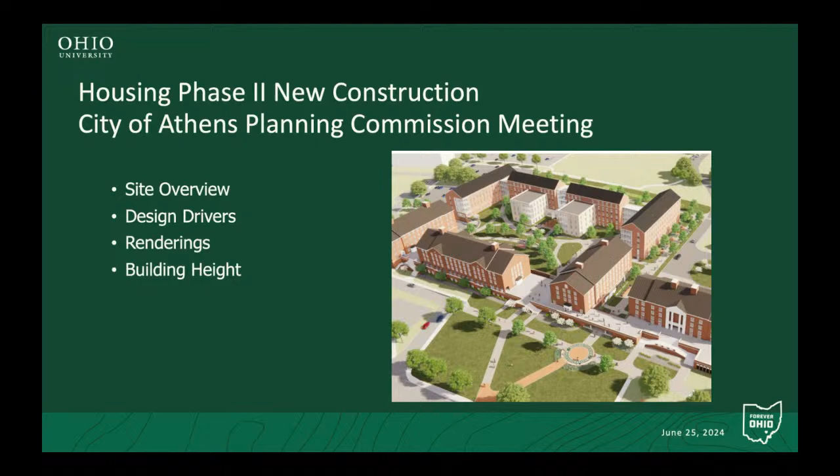I also want to talk a little bit about our nonconformance with the zoning ordinance in the R3 neighborhood in which we're building this property. So I'll spend just 5 or 10 minutes giving you an overview. Please feel free to interrupt, ask any questions. I'd be happy to answer any along the way.

This is a new residence hall being built on South Green, just behind the front four, which many of you are familiar with. It's a 591-bed residence hall, about 165,000 square feet and 5 stories. It will be built, as many of you know, in the FEMA designated 1% flood zone, so we've taken that into account in our design, building the site up out of the flood zone. The first occupied floor will be 642 feet above sea level, about 1.8 feet above the 1% flood elevation.

To give you an overview of the site, on the screen you'll see the front four buildings and Wilson Hall along the top, and just to the east, below those buildings, Pickering, Brown, and MacKinnon, you'll see the new proposed residence hall. This is one building — although on this plan it might look like 3 buildings, they are all connected. It has one address, one fire alarm system, and is being treated as one facility.

We have coordinated the design of this building with all of the emergency services within Athens, and as I mentioned, we've just started construction back in early May with some of the deep foundation and site work.

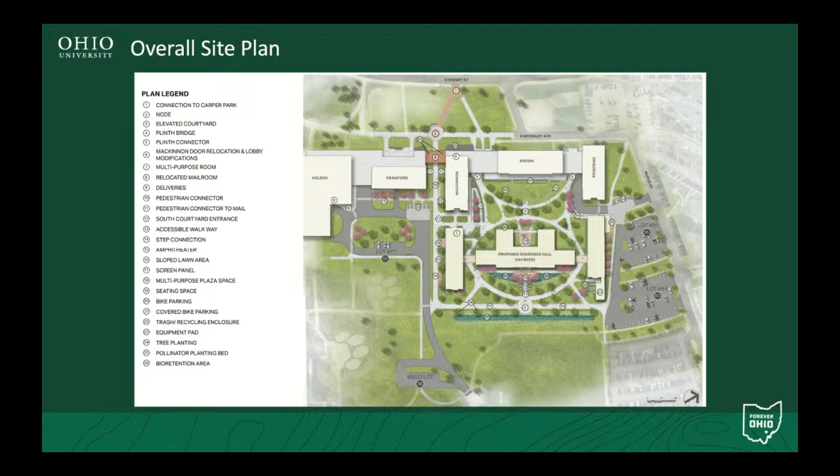To give you an overview of what drove us as we designed this project, the focus was on creating a modern, flexible, active environment that meets the needs of our students today. A big part of our design process was engaging the student body to hear what was important to them. One theme that rang true throughout was health, wellness, activity, and connection to the outdoors. You'll see how we've incorporated these elements into the design, including the siting of the building on South Green with adjacency to the bike path and the Hocking River.

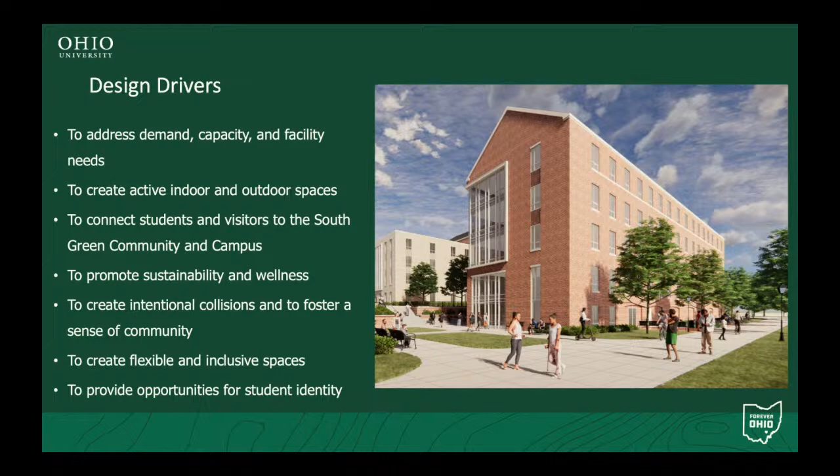I'll spend a couple minutes going through a few renderings. This is one of my favorite shots of the building, rendered from above, showing the size and scale of the building and how it relates to the existing facilities in the front four. Many of you remember the back south buildings that previously occupied this area. Starting in 2016, we began taking several of those buildings offline because of deferred maintenance and their inability to meet the program needs of today's students. That made space for the construction of this new facility.

This is a view from the east, with the Hocking River behind me in this view. As I mentioned, connection to the outdoors was an important part of the design process for our students. You can see how we've intentionally designed this back door of the residence hall to provide connectivity to the river, to the bike path, to the recreation fields on this part of campus, as well as to the green space we've worked hard to preserve through the design process.

Which is a good transition into our nonconformance with the zoning. This is an R3 zoned area in the city, and the maximum allowable height for a facility here is 2.5 stories or 35 feet. I outlined in the cover letter that our building as designed is 5 stories and about 69 feet tall, so it is above the allowable height limit.

That summarizes what I wanted to share with you today, but I'd be happy to answer any questions about this facility, our intent, the program of the facility, or our intent to invoke the government property exemption clause within the zoning ordinance.

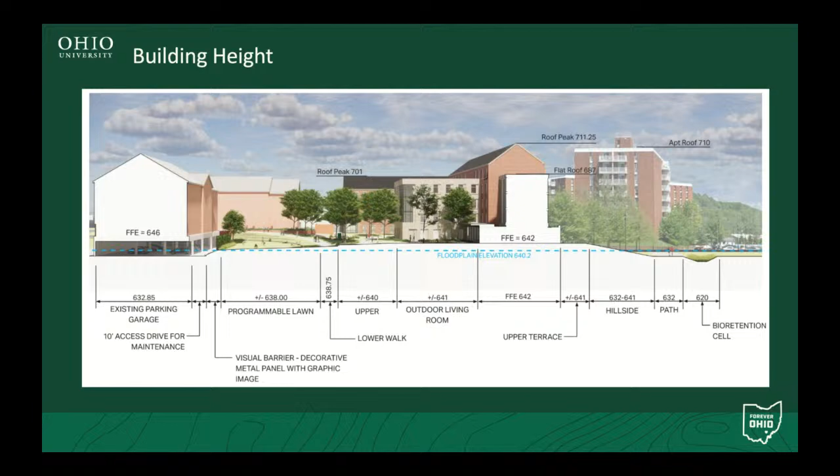So there are several single-user restrooms in that space, as well as kind of an open community meeting room type of space. That space has been designed for flow-through flood construction, so in the event of a flood at that elevation, it would be able to flow through that space, and it's been designed to meet all those building code and associated requirements.

Mr. Chair, we know that the current FIS flood insurance study is going to be modified this September. That elevation will change at this site. So we asked the engineer and architects looking at that to check both of those base flood elevations, the 1% he's talking about, and it meets the requirements for both the existing FIS and that new proposed FIS that will become effective this fall. So we looked at both of those, and it still meets all the requirements.

In addition, we talked to the architect and engineer about making sure that the fill they're putting in is compacted correctly as required by FEMA regulations. They also did checks to make sure that the bottom of the elevator shaft is not going to have a problem with buoyancy in the event of a flood. So they did a lot of extra work to make sure this meets all the requirements of FEMA.

Thank you for that. So you are not adding any parking? In fact, you may have taken some away with the site you're using? We are. We're actually removing about 180 surface parking spaces. We do intend to bring some of that surface parking back into this part of campus in the future, although it's not intended as part of this project. We're considering options for additional surface parking spaces as a separate project, and any associated water quality issues and best management practices will be taken into account in the design of that parking lot.

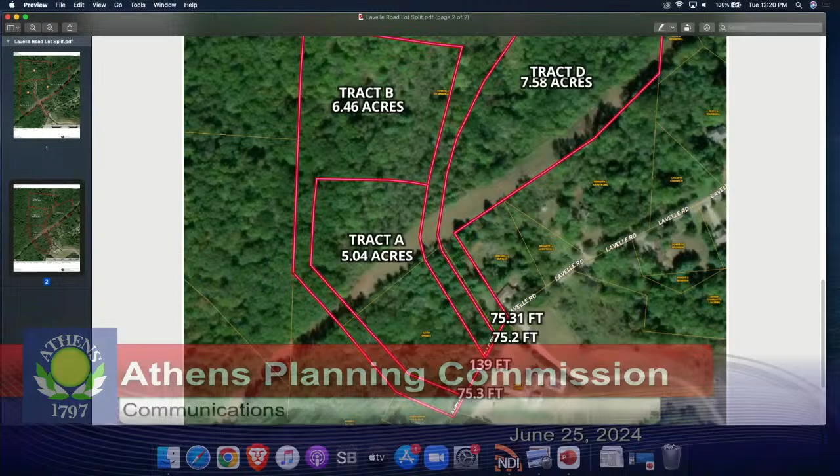Any other questions? Okay, so then I would open it up to Mr. Chamberlain to present what he hopes to accomplish there off of Lavelle. Make a Macintosh work.

I own a 23-acre parcel on Lavelle Road, and my intention in applying for this variance, as David just mentioned, is to be allowed to split this one large parcel into 3 parcels, only one of which would have the required road frontage. The other two would essentially be landlocked, which the minor subdivision regulations don't allow, and that's what kicks it over to the major subdivision process.

I'm in the real estate business and I'm familiar with shared driveway easements, and I understand they can be complicated, but I would work carefully to not only put the road in myself, the driveway, but to also have the proper framework for that shared maintenance that would benefit all 3 owners.

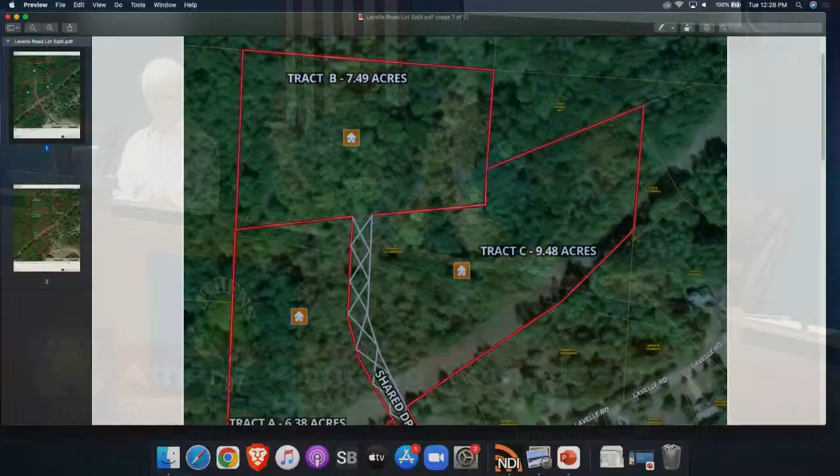In this proposal, what's happening with the lot that borders Lavelle? Good question, let me see if I can get this thing to... So below tract A, we can see it down here.

Below tract A, it's approximately 3 acres. It's an already existing parcel. So the one that uses road frontage would use that extra 3 acres with all that additional road frontage to do those long-legged lots, right? In this case, this would just be preserved. It's a challenging site. It was on the market for many years. Nobody ever built on it, or nobody ever bought it.

I probably would be inclined to just go ahead and sell it with tract A, and just combine what's south of tract A, that 3 acre piece there, just to go with tract A. It would make all the acreage approximately 9 acres that way. So I don't know, I probably would just wait and see what happens with tract A, and if somebody's like, well, I'd love to just get the rest of it, I would probably do that.

Could it be sold as a separate parcel? To answer that question, yes, it could be. It already exists as a separate parcel. So the value of that is probably fairly minimal, just because of issues with the ravine and with putting any kind of septic system in. I don't have the topo map up there, I'm sorry, but yeah, there's a lot of hillside there. It's not practical to come off of Lavelle.

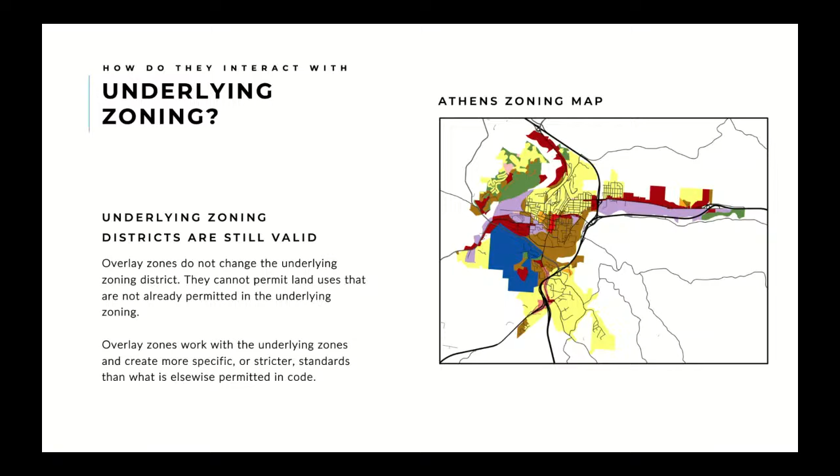Also, overlay zones work with the underlying zones in order to create more specific and stricter standards than what is otherwise permitted in the code. So they set higher standards for a specific area in order to meet certain goals.

Why even use overlay zones? They can help communities specifically meet stated goals, like in particular the Stimson Avenue corridor plan is calling for an overlay zone in order to focus redevelopment efforts along the Stimson Avenue corridor. Communities often use overlay zones to protect special features such as historic buildings, wetlands, steep slopes, and waterfronts. And they can also be used to promote specific development projects such as mixed-use developments, waterfront developments, housing along transit corridors, and even affordable housing.

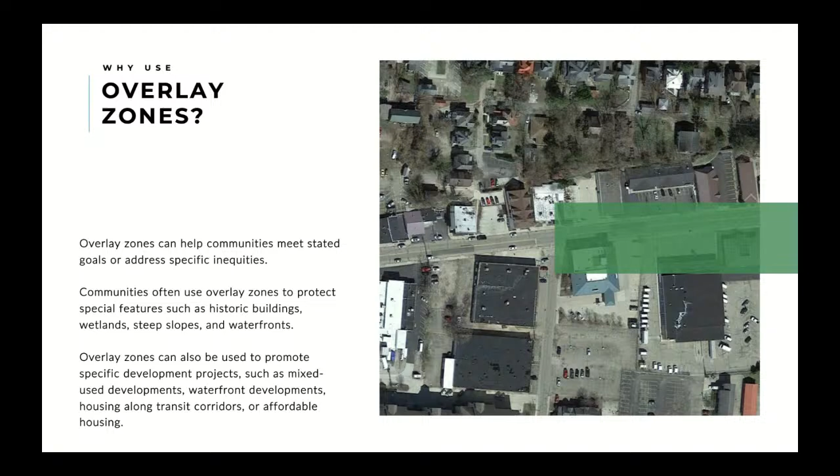Athens has two existing overlay zones. First, the wellhead protection area is technically an overlay zone, and it establishes additional regulations for protecting our drinking water in the area surrounding all of the wells, and it is quite a large area. We also have historic districts, which are technically an overlay zone, and these protect and preserve historic sites and encourage compatible changes with our historic image. I just wanted to give those as examples of what we already have here in Athens.

This is relevant to the Planning Commission because the Stimson Avenue Corridor Plan calls for an overlay zone, and the Planning Commission has identified that overlay zone, establishing it as a goal for this year. This overlay zone, the plan itself listed several goals for it to achieve, including creating opportunities for placemaking, promoting pedestrian-oriented development, similar to what you see here in this photo and our rework of the right-of-way there. Also, we're looking at floodplain mitigation issues that have been common along this corridor, and then also looking at potentially adopting parking maximums in order to further promote that pedestrian activity along the corridor.

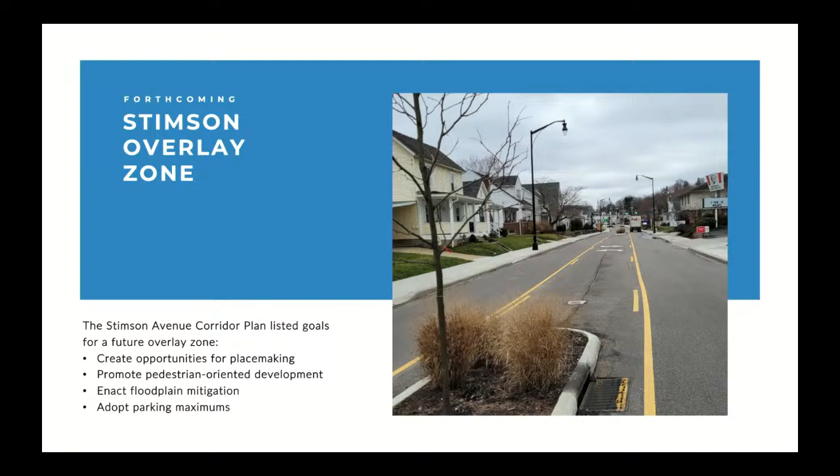In the Stimson Avenue Corridor Plan itself, it established the boundary map that you see here on the screen, and this may change for the overlay zone. We'll establish those exact boundaries with our consultant, American Structurepoint, once that plan gets on the books.

We will, in the process of establishing this overlay zone, engage the public and seek input and guidance for what needs to be included in that overlay zone. Then American Structurepoint will work on creating the code language that we can adopt, and they will also help represent the overlay zone at city meetings, including Planning Commission and council meetings.

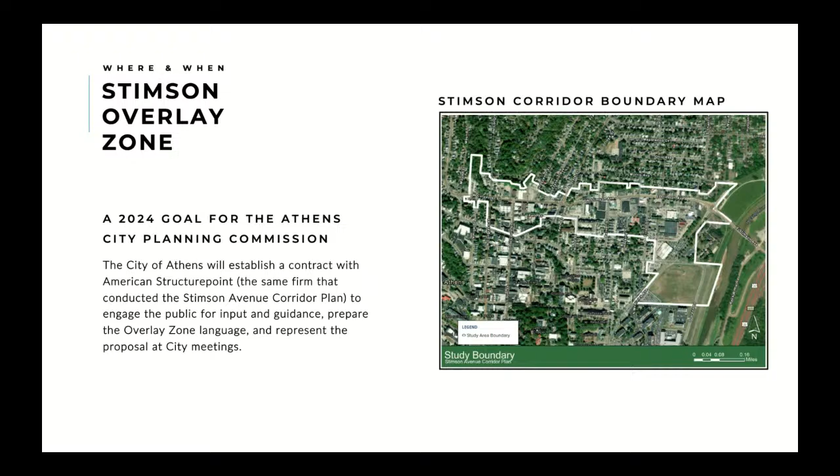That's all I had for right now. Our process, we're still working out the contract with American Structurepoint, but we've had recent meetings with them about beginning that process. We've got them pulled in with our Appalachian Community Grant Program funding as well, so we've got ongoing conversations with them about that project.

Does any of the commission members have questions specifically about overlay zones? Did you have some, Andy? Go ahead, Mr. Stone. Thank you, Mr. Chair. Thank you, Ms. Jennings.

Can you describe, the overlay zone reportedly would put stricter standards in a particular area on top of the underlying zoning. Traditionally, we think of stricter standards as something that limits the flexibility of the underlying property owner and potentially limits the value of the property. Can you think of a situation where that would be reversed, where a stricter standard would actually increase the value of the underlying property?

One example that comes to mind is the brief mention of parking maximums, especially along Stimson Avenue, where we have fairly narrow property depths. For commercial development, pushing those structures up to the right-of-way and increasing that pedestrian-oriented development, putting the parking in the back and reducing how much you provide, actually creates a healthier network since it's plugged into the Near East Side neighborhood and closer to campus. Looking at those parking maximums actually creates a healthier community because you can build a larger building, since you don't have to take up your lot with parking, and it creates an environment more enticing and healthier for pedestrians living in the area.